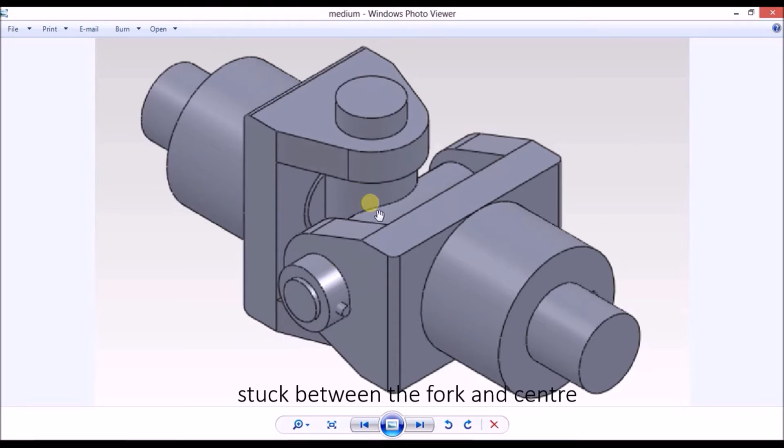In this part, the holes are for the taper pin to enter, and the pin goes inside this collar, and the taper pin intersects the pin and the collar, making it stuck between the fork and the center. So let's start over. We go to new, we go to part.

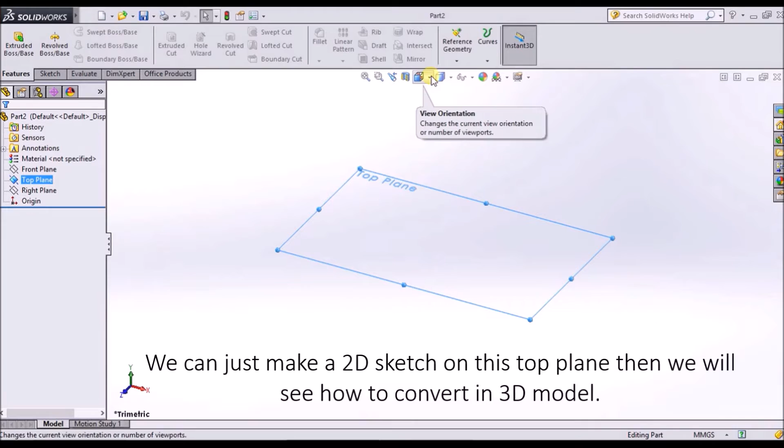Okay, now in 3D SolidWorks, what we need to take care of is that there are three planes and we have to decide on which plane we want to work. Since it's a cylindrical component, we can start with the top plane. We can just make a 2D sketch on this top plane and then we'll see how we convert it into a 3D model. So we go to view orientation and then we click this option, normal to. The normal to option rotates the plane which we have selected and makes it normal to our vision.

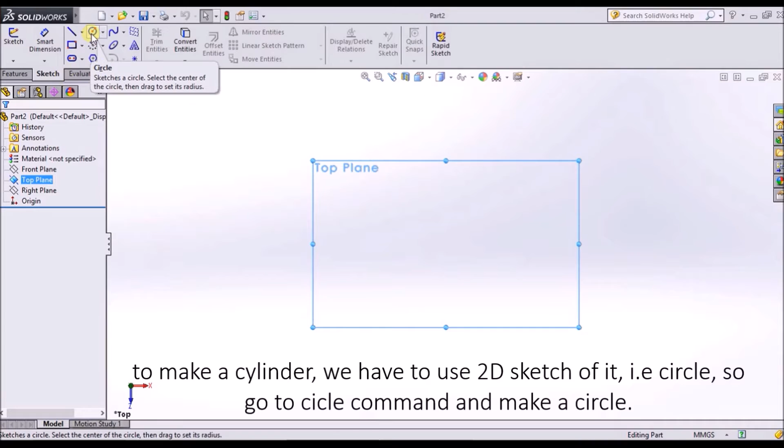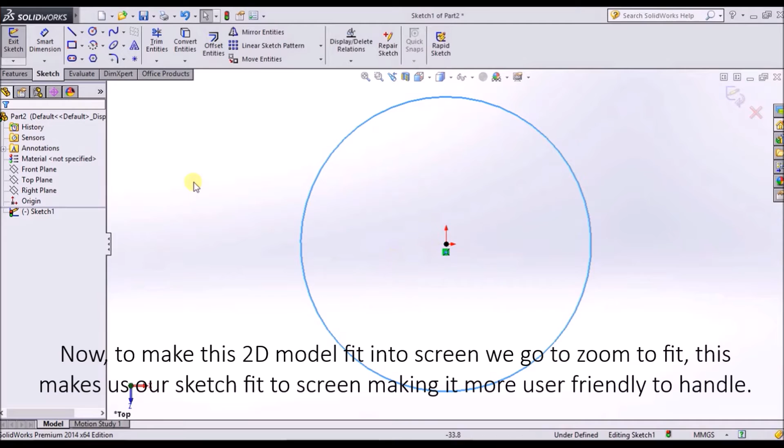There we go. So now to make a cylinder, we have to use the 2D sketch of a cylinder, and that's a circle. So we go to the circle command, we make a circle, we put the dimensions. Now to make this 2D model fit into our screen, we go to zoom to fit. This makes our sketch fit to the screen, making it more user friendly to handle.

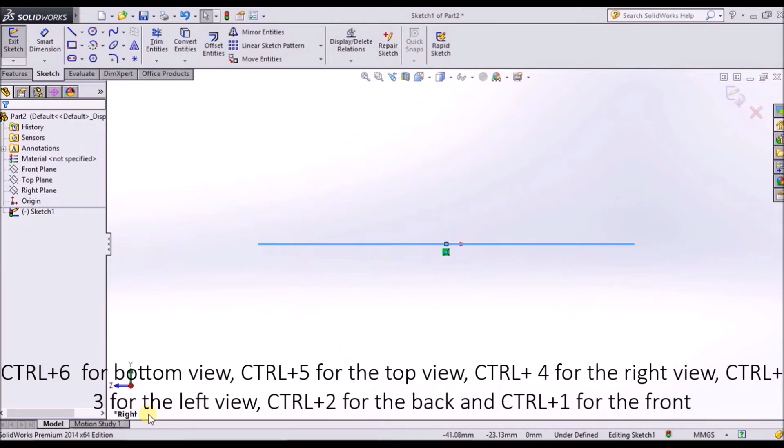So now we can go to the isometric view by Ctrl plus 7. As you can see, the isometric view comes written here. Ctrl plus 6 is for the bottom view, 5 for the top view, 4 for the right view, 3 for the left, 2 for the back and 1 for the front. Let's switch to isometric view again.

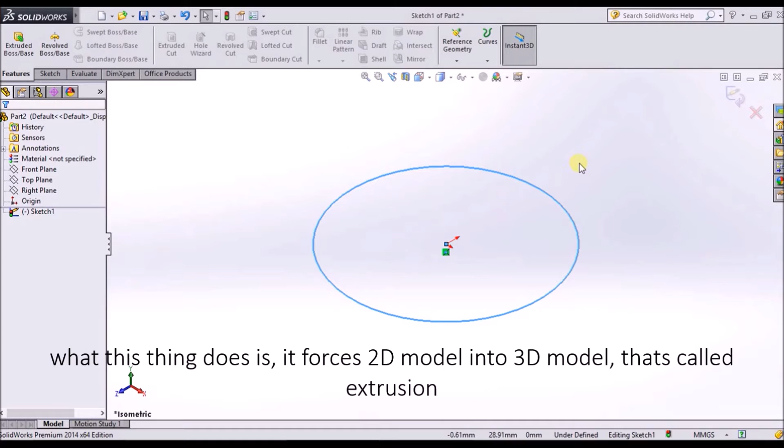Now to make this circle a cylinder, we go to the extruded boss or base command. What this does is it forces a 2D model to a 3D model. That's called extrusion. So we go to extruded boss or base. As you can see, it's extruded by 10 mm by default. We put it to 20 mm.

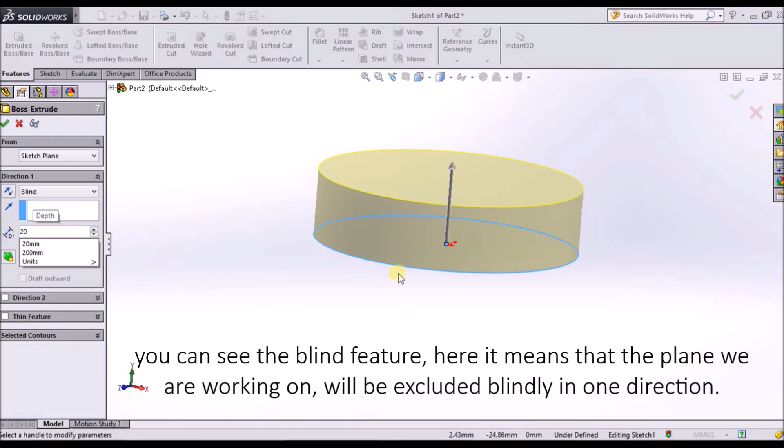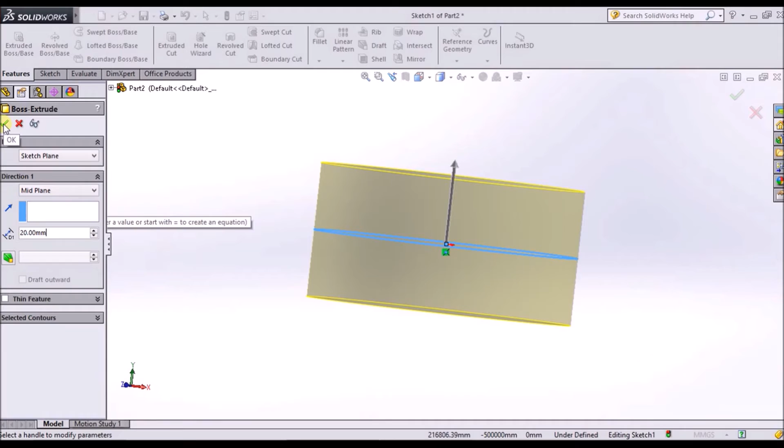Now as we can see, the blind feature here, the blind feature means that the plane we are working on will be extruded blindly in just one direction. But since we need holes in the center of the collar, we go for the mid plane feature, which makes an extrusion of 10 mm on both sides since we use 20 mm. So we put a tick and there we have our basic model, a cylinder.

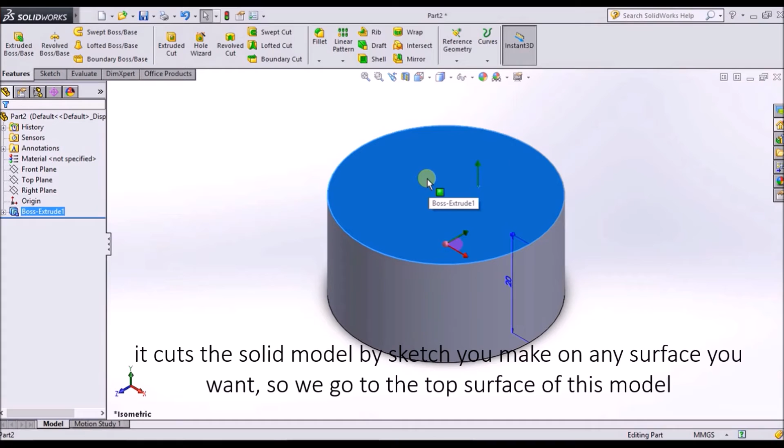Now to make a hole in the middle, what we need to use is the extruded cut feature. It cuts a solid model by a sketch you make on any surface you want. So we go for the top surface of this model. We again use the same feature, normal to. The surface becomes normal to our vision. We again go to sketch, draw a circle, this time with a lesser radius. We go for 18 so that the thickness or the width of the collar is 2 mm.

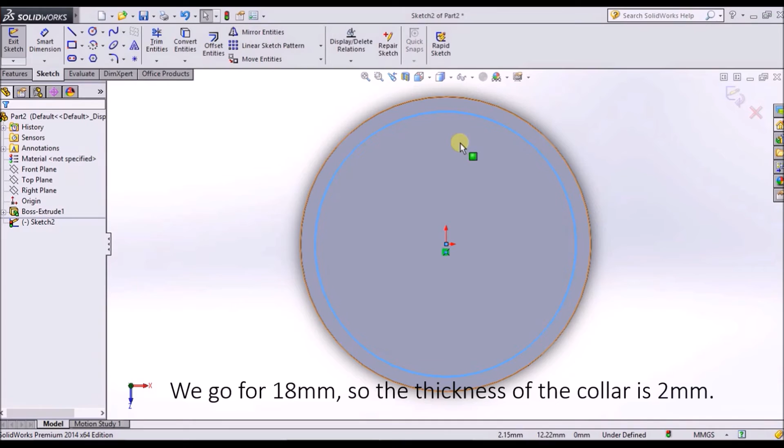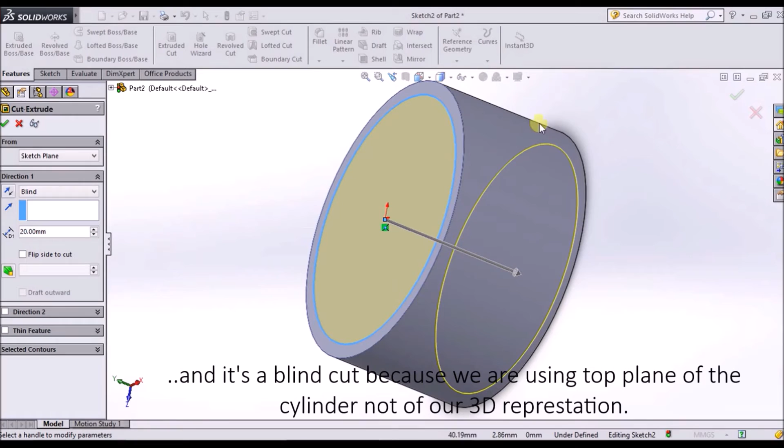Now we go for extruded cut. As you can see, it makes an extrusion cut of 20 mm by default. So that's all we need, and it's a blind one this time because we are using the top plane of the cylinder, not the top plane in our 3D representation. So let's put OK, and there we have a basic hollow cylinder for the collar. We go to isometric view again.

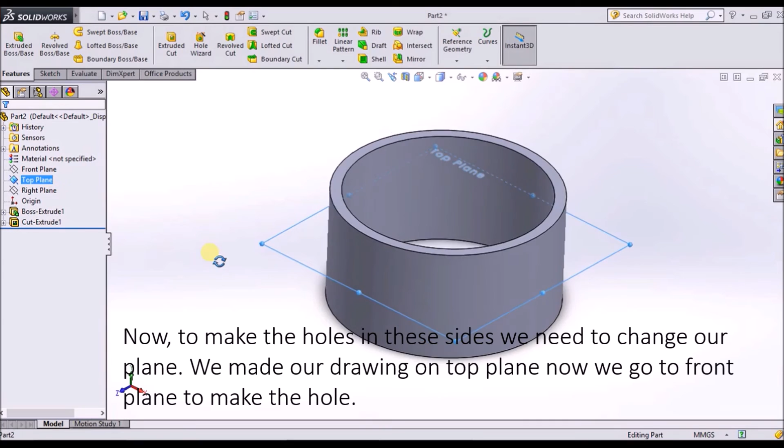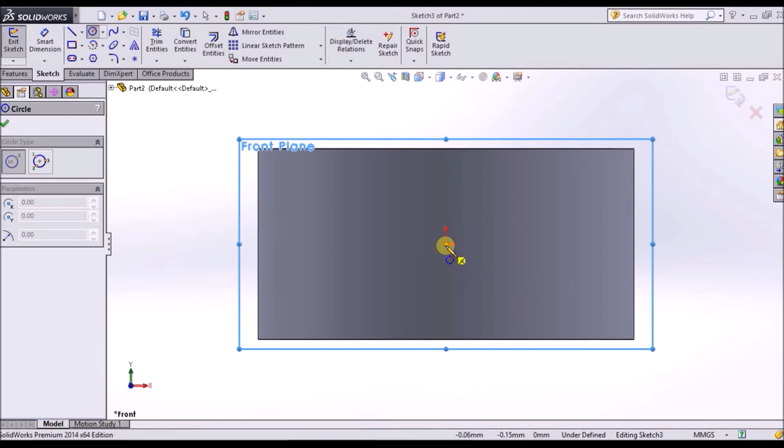Now to make the holes in this and this side, we need to change our plane. We made our drawing on the top plane, as you can see. Now we go for the front plane to make the hole. You can use the front plane or the right plane, either of them, it doesn't matter much. So we again use the same feature. We click the front plane, we go to normal to, and again sketch a circle of radius 2.

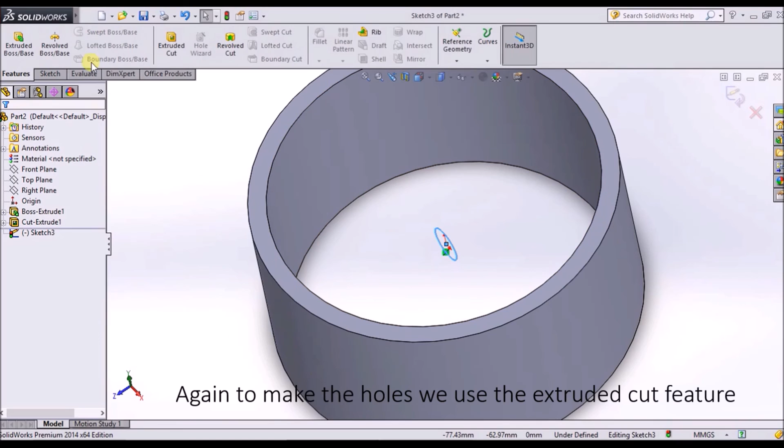Now one thing we need to take care of is that the circle is not on the collar, it's on the front plane, that is right in the middle of the collar. So again, to make the holes we use the extruded cut feature. Since we need holes on both sides, we go for the mid plane feature.

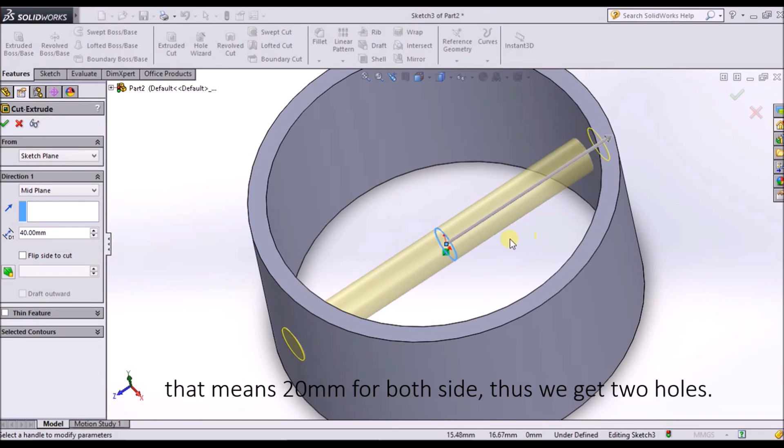As you can see, we have used 20 mm, so the cut is not intersecting with any part of the collar. So we need to set this to 40 mm. That means 20 mm on both sides, and thus we get two holes. We go okay, and there we have it. We go for the isometric view, and that's how we do it.